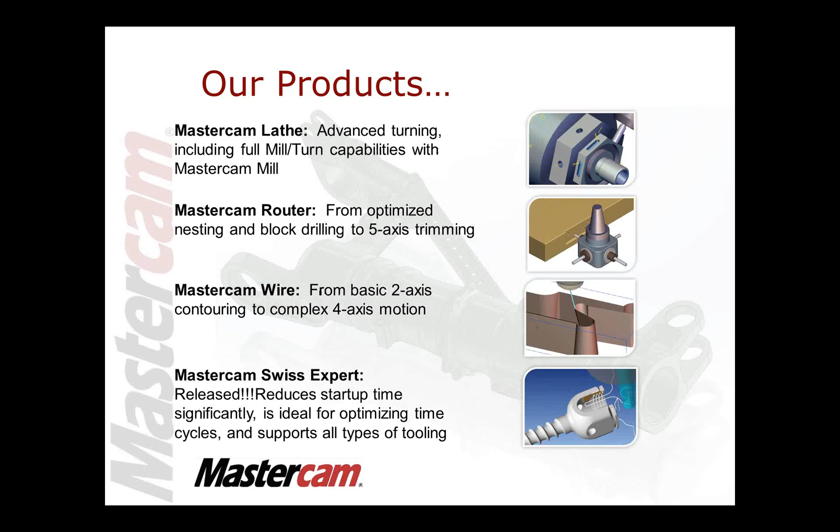As an add-in in Mastercam, if you need to do quick inspection, first article inspection, we do have an add-on now where you can buy a whole package, which includes the software, the arm, and everything. If you need more details on that, feel free to shoot us an email. Robotmaster is another add-on that's gathered a lot of interest, and we have several customers utilizing it. Basically, this allows us to program these robotic arms offline, being able to optimize and generate G-code for these. Also, you can see here on the screen, we've got it set up specifically for a welding application.

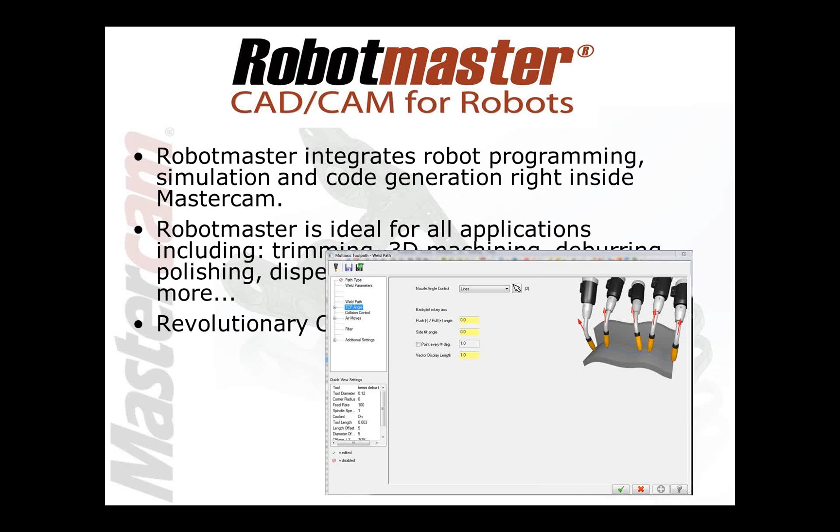CIMCO, I'm sure a lot of you already know what CIMCO is. CIMCO handles DNC, so you're able to send and receive programs. This also has another add-on, our CIMCO PDM, which is a light PDM that allows you to manage a lot of common files, being drawing files, Mastercam files, setup sheets, pictures, and all that. It just helps put all these into one database so you can quickly find it by typing in the customer's name.

So getting into the nuts and bolts, talking about what's new in X7, there's several different things in here. I couldn't put everything onto here, so I created just two quick slides showing some of the new features. Some of these I am going to cover today, the others I'm not going to cover necessarily. We are planning on doing rollouts where I'll get a lot more in depth going through all the new stuff when X7 is released, probably in the April, May timeframe.

But some of the things that are new are the new editor, some new enhancements we've done to our solids, new X-form project improvements, the new chamfering with the fillet command, surface filleting. Also what's pretty exciting is our new and improved backplot and verify utilities. Stock model has been made a lot faster, same thing with dynamic and OptiRough, better motion, faster regeneration times.

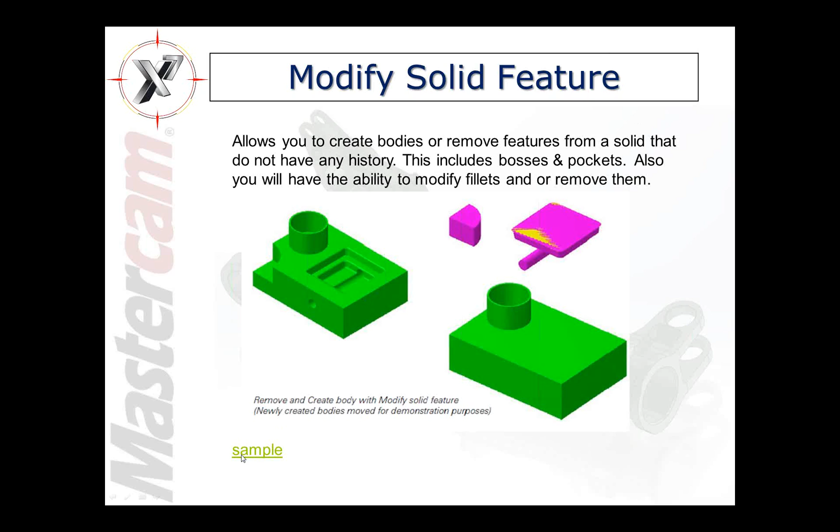But just to give you a quick sample of what we can do, basically we can take away fillets, we can add bosses, pockets. So let me go ahead and jump into a quick sample file. I'll launch into Mastercam X7. Once again, this is a beta, it's not released yet, it's only a beta.

So basically, if I have a part like this, I can go ahead and shade it. What's nice too is this part was created inside of Mastercam, so you can see I've got a complete history here. If this part was not made in Mastercam, I would not have this history.

Underneath the Solids menu here, and Solids is an add-on, you have several different items. I'm going to go through a few of these today. One of the things that's kind of nice, if you want to go ahead and remove the history and make this a dumb block, you can just say give me a dumb block, and basically it clears off the history. So now I don't have a history anymore.

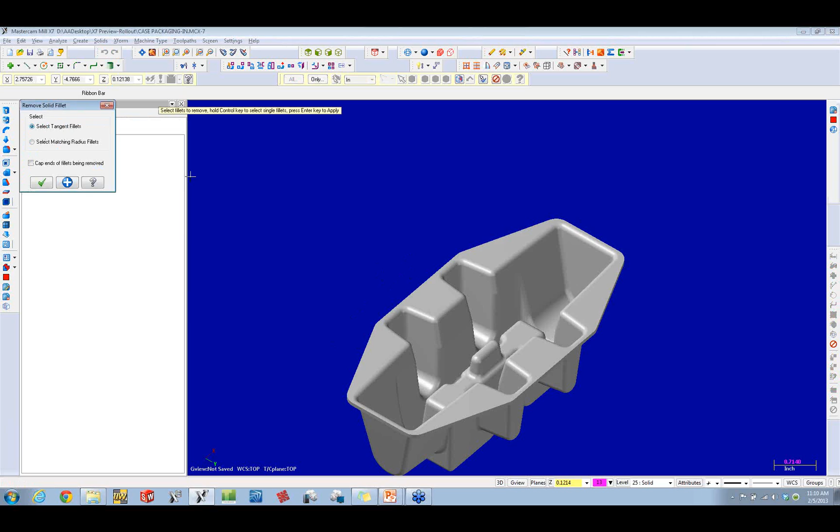Okay, so let's say I did want to go ahead and suppress some fillets in there, if I imported this from a different CAM or CAD software and wanted to suppress the fillets. So I can go into Solids and basically say remove solid fillets. Mastercam says, hey, are you sure you want to do this? Yes, so I can select all tangency fillets. If I come over here, I can click here, and you can see it picked up the edge, and I can say go ahead and just remove those fillets.

Mastercam removes the fillets, as you can see. Now, maybe what I want to do is make a quick impression of this to be able to create it for a pattern or a fixture, or maybe I want to make an electrode.

So what I can actually do is go into Solids, and let's go to Modify Solid Feature. Basically it says, hey, are you sure you want to do this? Yes, I do. So now I can either create a body, remove a body, or remove and create a body. So right now what I can do is select these tangency faces.

So if I select here, it tries to grab as much as it can. I can select here, select here. You can see I'm just going around picking it, and it's grabbing the tangency faces the best that it can. So in a few seconds here, you can see I've picked everything I want to. We're going to go ahead and create a body.

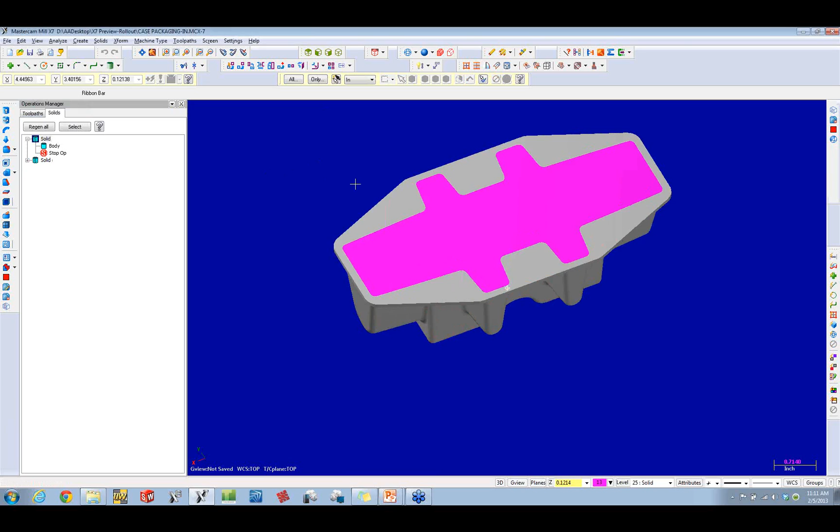Mastercam creates that body. And then what I can actually do here is simply tell it to hide, and I just want to keep that, and now, as you can see, I've got a quick impression.

So maybe I want to go in there and go one step further and modify a radius. So if I go underneath the solids, I can go under there and say modify solid fillets. Yes, and you can tell it not to keep prompting me.

And I know I've got a 90 thou radius here. You can see it picks up everything that's tangent to that. There's the 90 thousandths, and maybe what I want to do is make this 60.

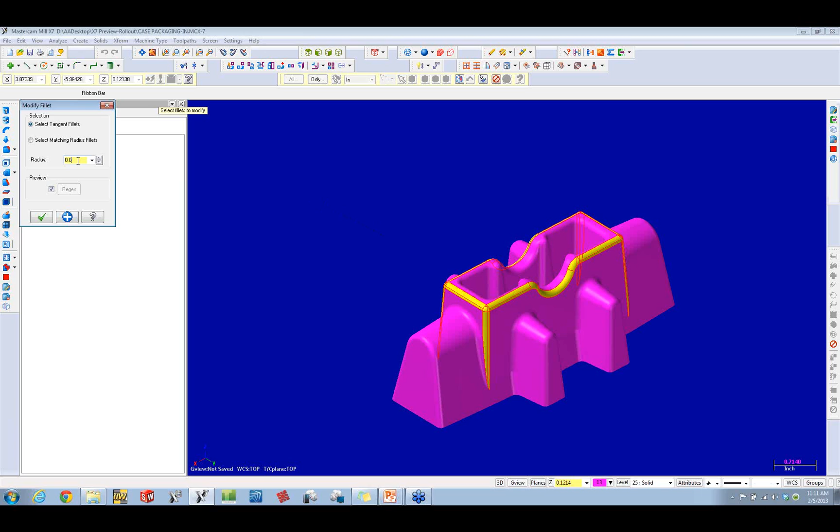So for simple, quick edits like this that you might want to make, you can make them quickly and easily with some of the new tools that are inside of Mastercam X7. So let me close out of this, go back to my wonderful PowerPoint.

Another feature that I kind of showed as I was going through there is the ability to create hole axes.

So what you can actually do - Dave Miller was the one that really brought this to my attention. It's a kind of cool feature. A lot of people think, well, hey, why do I have to create that geometry, or why do I need axis lines and all that if I'm just doing basically 2D machining?

Well, this comes in very handy because it works with through, blind, split holes on a different plane where I can get that 2D geometry quickly and easily to do maybe 2D functionality where I just want to drill a hole and pick up on that or create that point. If I've got a surface that's kind of dome shaped, what I want to be able to do is quickly and easily have a round circle that I can pick up for 2D toolpathing.

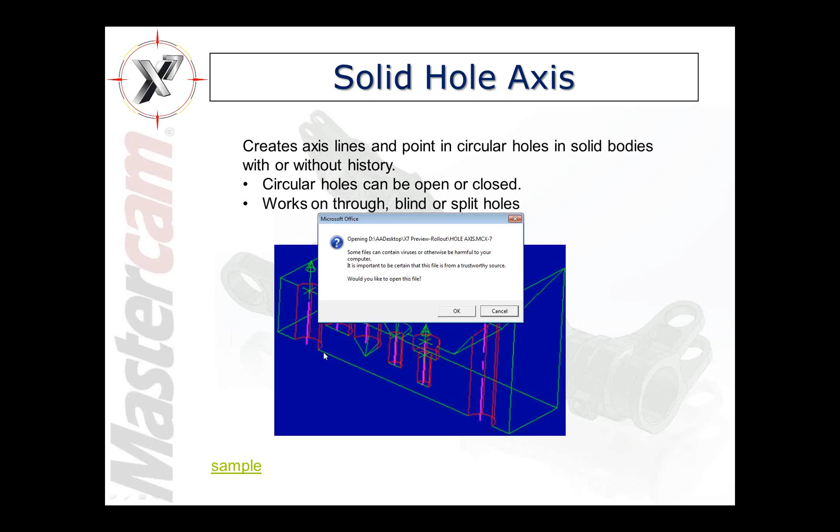So what I can actually do is click on the sample here, click OK. And basically here I can go in and hit shade. I pulled on a part. And so here I've got a part with some holes coming in at different angles.

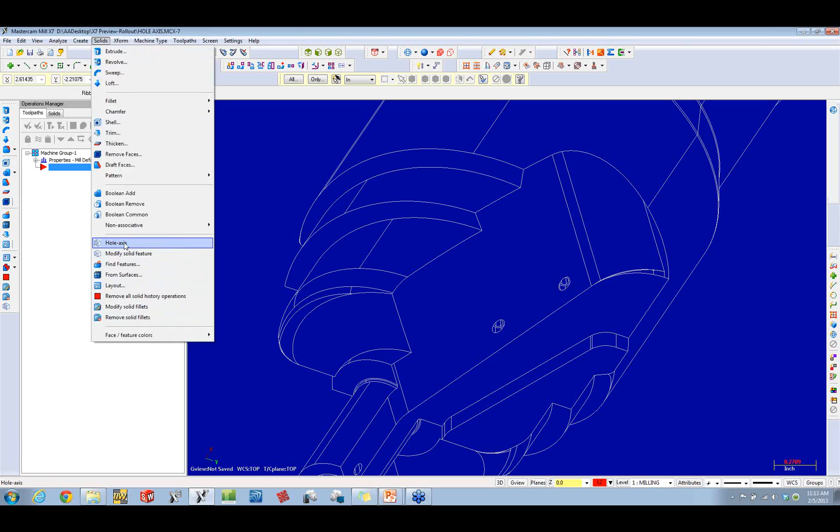So what I want to do is create that geometry quickly and easily. So I can go into Solids. I can go into Hole Axis. And basically now what I can do is actually pick on the hole axis that I want to create.

So here what I basically did was create that axis line, and I also have that 2D round circle that's there. And even on something more complex, you can see I have a surface here. If I try to create that 2D geometry, I'm going to get a spline or an ellipse. So if I click here, you can see now I'll exit out of this. And if I go and unshade, analyze that, I now have a complete arc that I can easily and quickly pick up on.

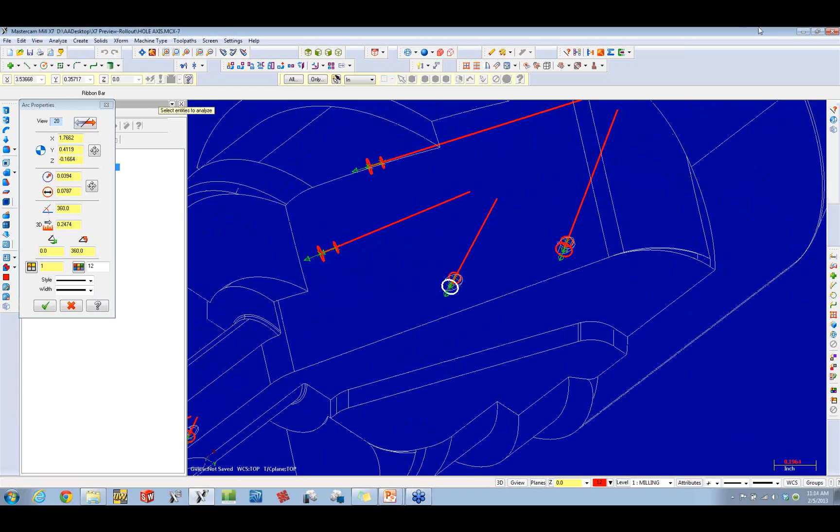Let me go on to here. Morning, Jack. All right. Hey, I could have a guest speaker. I thought it would be 100 people.

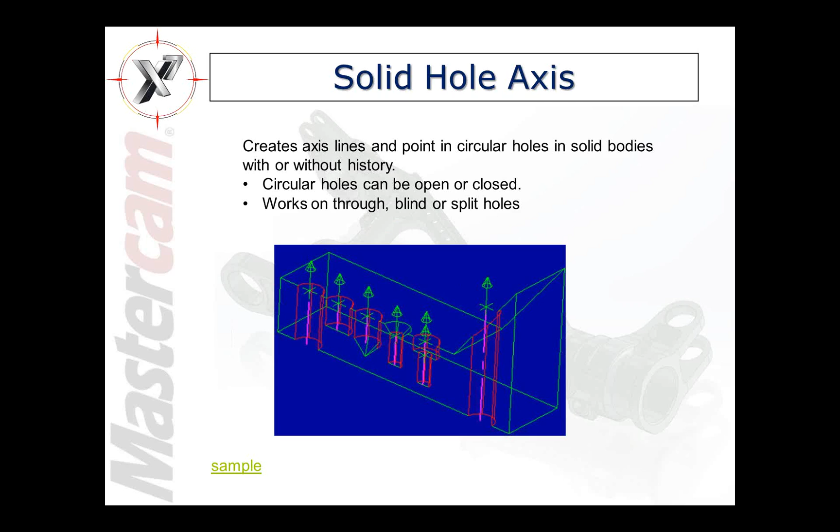All right, so going back to this, the next thing I can go through that's been improved in X7 is X-form project improvements. Basically, this is going to allow anybody that needs to project 2D geometry down onto a surface - a lot of times when you get into small, intricate parts, small lines, the tolerancing sometimes doesn't give you exactly what you want.

They've added this into the bottom of here, being able to smooth out some of this. So when I am projecting down small, intricate lines, splines, onto a surface, I can get a better result, smoother toolpath motion.

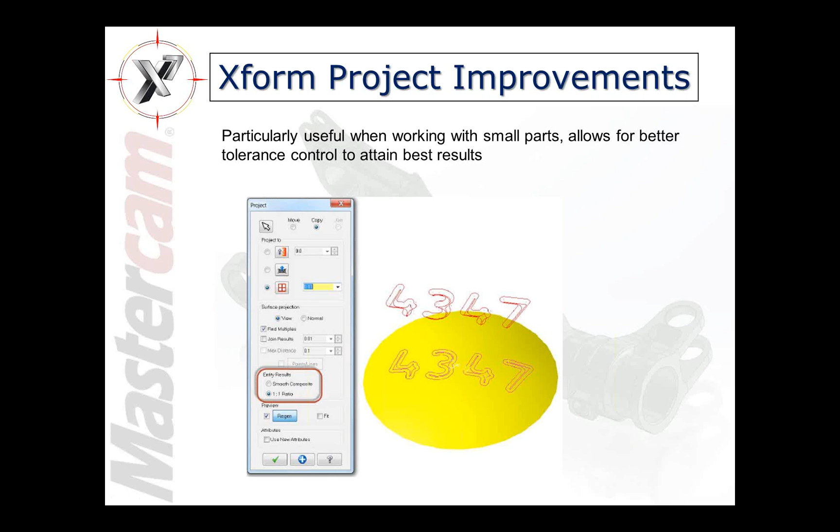Like I said earlier, they did go and improve the backplot verify. Verify as you know it from X6 is dead, they've added now this new verify. What's cool about this is that not only is it a separate window, but I can launch it and continue to work inside of Mastercam, doing my simulation, everything in a separate window. So if you guys are using dual screens, this will come in very, very handy.

Now there's a new backplot along with this, but if you want to, you can go back to the old backplot. Personally, I really like the new backplot. The more I play around with it, it is very handy, and there's a lot of good information it can give you. But I'll show you more on this in a minute.

The other thing that's brand new coming out in X7 is the probing that's integrated in with Mastercam X7. It's Renishaw's Productivity Plus, this is an add-on. This is basically being able to go and measure right on the machine: fixture offsets, orientation, critical dimensions, and there would be some post modification necessary to get this output.

What I'll do is give you guys a quick rundown on this. Once again, if you want to know more about this or would like to see something more, shoot us an email. I might even break this off, and I'm pretty sure I'm going to break this off and do another webinar where I'll just focus on utilizing this inside of Mastercam.

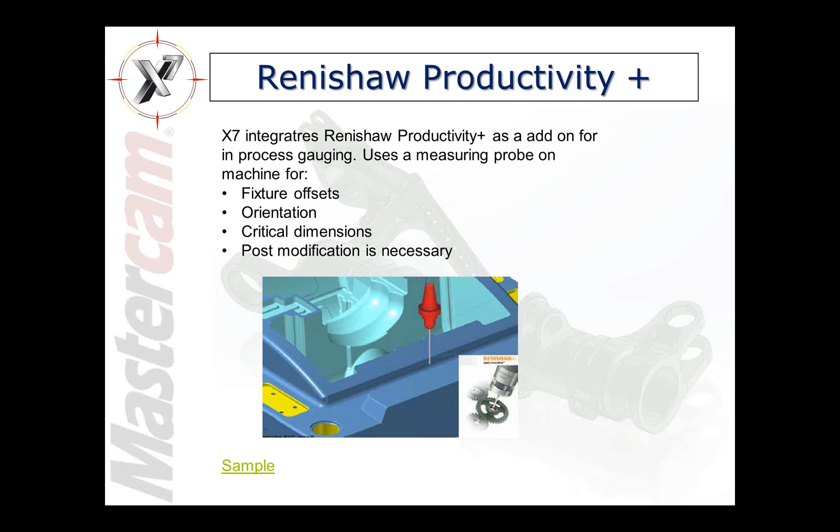So let me just pull up a file here.

So basically, here is my part. I've got a part on my screen, and I also have some of the operations with some probing on there. Now your probing is just going to be underneath your tool path. You're going to have a dialog box called probing here. So your basic main functions that you're going to use are going to be right here.

This is for being able to go in and measure a point, measure a line, a circle, a plane, corner, a 3D measure, or doing a web or a pocket, whether it's cavity or core. Those are your main ones in there.

So basically what we ended up doing right now is going into here, and the first thing I did was a probe. The reason why I did this is I wanted to go and set up my work offsets. So inside of here, I just basically took a measure of the top to set my Z, and I'm updating that back to my WCS.

Then what I did is a web pocket where I'm coming into here and basically measuring sides of my part. So here I'm coming through, I'm going to measure this side with 3 points, measure side 2 with 3 points, and then come back and hit the ends. Then once again, right here, I'm setting up to update my WCS. This can all be controlled right up in here with these menu options.

So once I have that done, I can kick into my new backplot. I'll show you what it looks like.

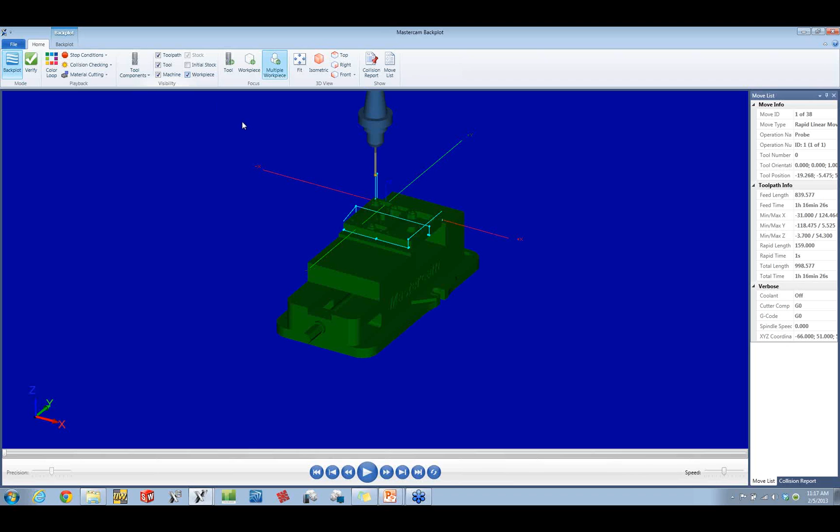Expand this out, and let's turn on my workpiece. So now you can see I have my workpiece on there. And then if I want to, I can come in, still hit the S button. I come in, you can see I just hit the top of my block. I'll come over, I'll hit this side, measuring 3 points, 3 points, and then my ends. So that's the backplot right there. You can also kick right into verify from here, which I'll show more later on.

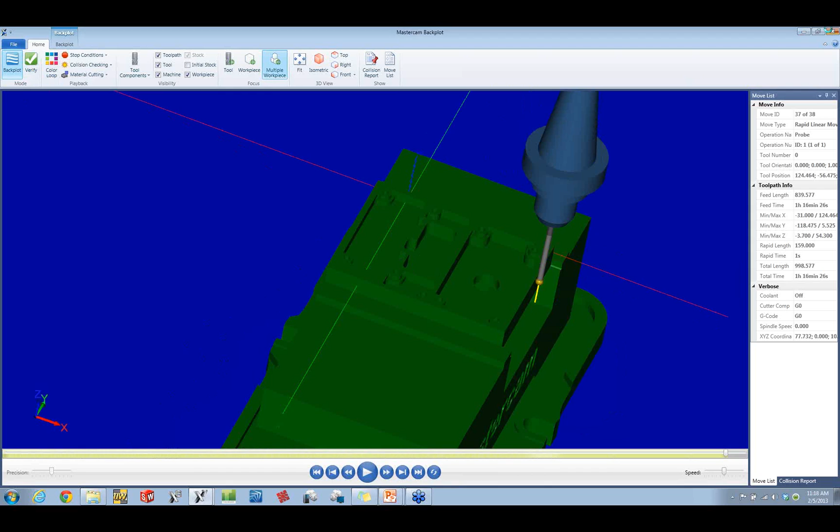So we'll close out of this operation. Now the next thing I do here is I come into a facing operation, just a typical facing operation. All I want to do is take this and just face off the top of my part. Now once I do that, I want to go back in and make sure that it's right, that I took off enough stock, I'm not leaving any stock.

Once again, I go in with my probing routine, and basically with this, I'm telling it to go ahead and inspect it, measure that plane, and make sure that is correct. If it's not, it will go back in, reference back to the facing operation. Once it goes back in, it will reference back to the second operation, making sure that it is correct.

So once I go back and update those, it makes sure that number coincides with what it's supposed to be as far as the plane being zero. It will either move to the next operation or go back and replay the facing.

Okay, so with this one, let me turn on my backplot feature here. Basically what I'm telling it to do now is come in, drill that hole, and then the next thing I create here is a tag, or a label as they call it.

The label is calling up this bore as something I want to inspect. I've gone in there, called that hole label 2, and then I'll go in there and hit it with a contour pass. So here, if I backplot this, you're going to see I go through and circle mill this out.

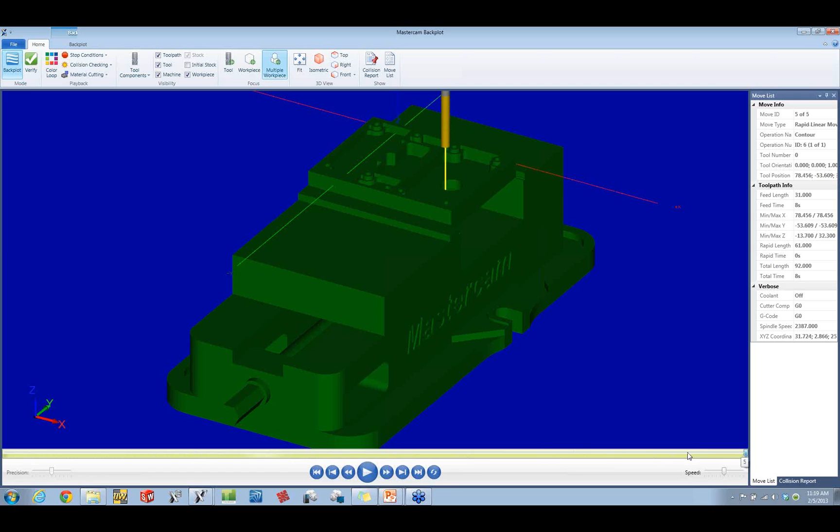Now what I want to do is make sure that is correct, and this is where I can really get creative on how I set this up. So the first thing I want to do is a 3-point measurement of that circle - where the center is, what the diameter is, it's an inside. If you guys have ever used Productivity Plus, a lot of this stuff looks very familiar.

And then what I can do is say, all right, if it hits my diameter, move to the next operation. If it doesn't, go back and rerun that operation again. And I can control my work offset based on that.

But that's kind of a quick rundown. Let me go ahead and post this out now. So what I'll do is post out the G-code and show the new editor too. Let's overwrite this.

Post all, yes. Right now it's going to ask me which Renishaw machine file I want to use. I'm going to just use my Haas macro and tell it to go ahead and process. It processes everything through - there's no errors.

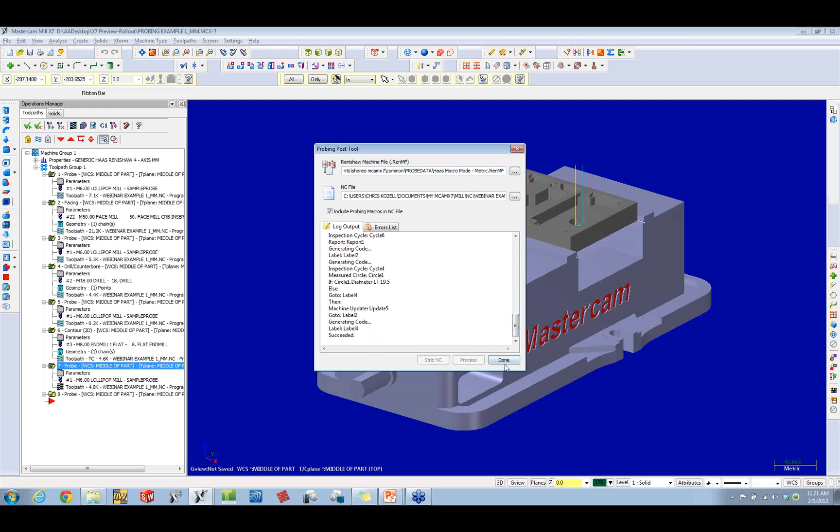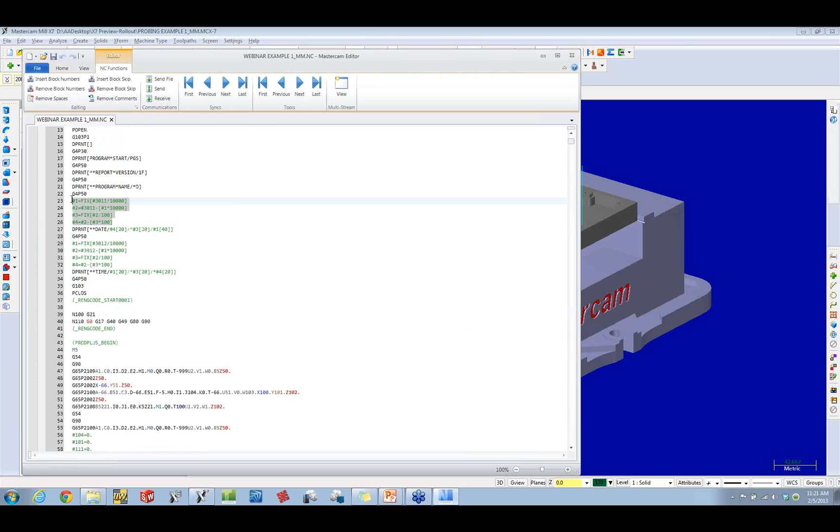And then I hit done, and now I launch into the new editor, which is called the Code Expert. So here you can see a sample of the code, and it has the probing routines already set up into here. And then I get into the heart and soul of the G-code.

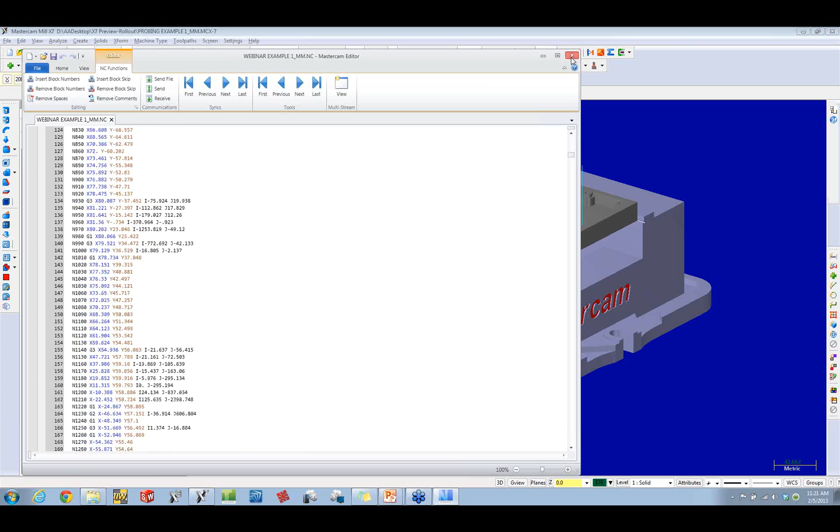Back to the PowerPoint. So I just showed you guys the Renishaw.

Now I'm going to talk a little bit about the new tool manager. Originally on the release of X7 it's going to be specifically for the mill side, then we're going to release it for the lathe side. What's cool about this is, once again, it's its own executable, separate window.

It runs off the SQLite format. It's got holder support, assembly, custom tool improvements, and also we can do speeds and feed lookups from the manufacturer, which is pretty nice. They're going to slowly start integrating all this in there with material, so I can actually pull the speeds and feeds recommended from a lot of the major tool manufacturers out there today.

So let me go ahead and launch into that really quick. I'm going to exit out of my PowerPoint - I've created a shortcut down at the bottom of my screen. This is the new Mastercam Tool Manager.

Once again, the tool manager that you guys were kind of used to inside Mastercam X6, it's still there. This is its own standalone. What this is going to give you is a lot more flexibility on setting up tools, holders, and doing a complete assembly based off of that.

So right now I'm going to open my library, and then open up my assembly, my holders, and my cutting tools. You'll see 3 tabs get populated across there. This is just a generic one I updated from X6 - all I did was take the ISCAR library and update it from X6, and you can see the different tools as I go through here. What's cool is I can dynamically rotate right into here.

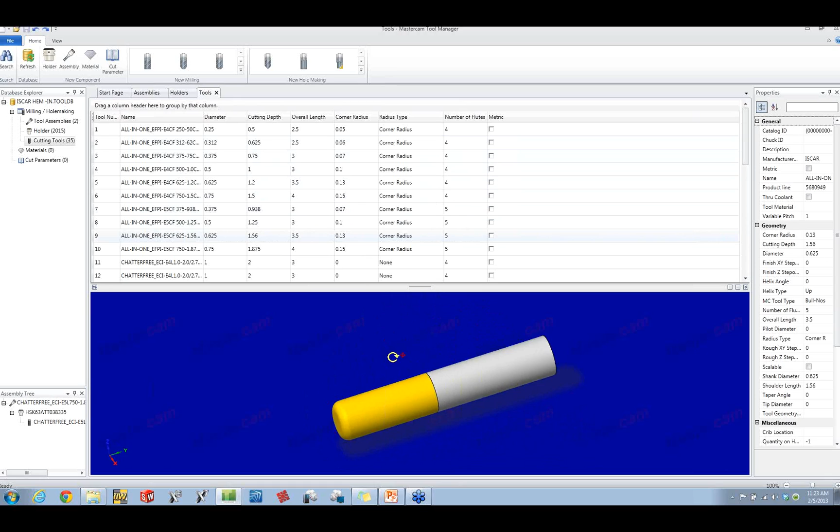If I want to see what the holders look like, I've got holders already set up in here that I've been playing around with - once again, I can dynamically rotate. Notice on the tool side, when I go into here, look at all the different information that I have available over here.

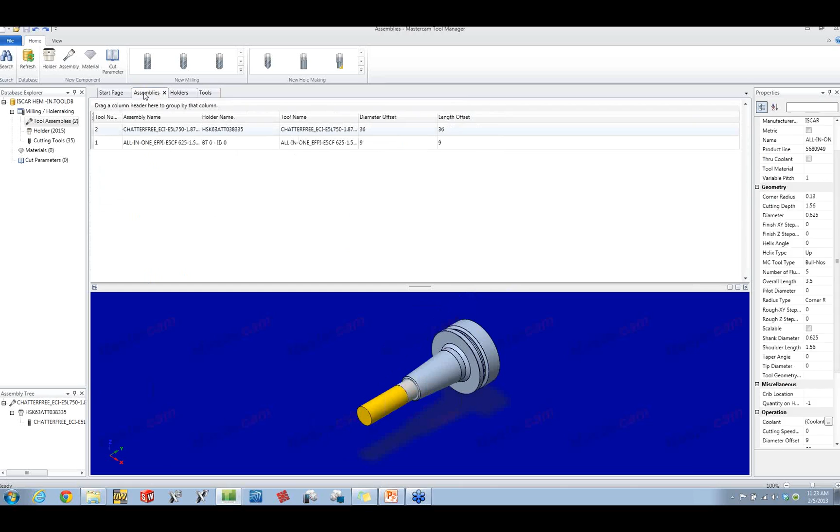So if I click on tools, there's a lot more information available to you for outputting, not only for something like a tool crib or some kind of tool management, where you can feed back a lot of different information back and forth, which is going to be nice. The other thing that's kind of nice too is the assemblies in here, so I can call up different assemblies.

Before, if you were programming in X6, you had your tool and then you had your holder, but you could never save both of those out as one assembly and then anytime you wanted to use it, use the tool, the holder, everything in one shot. This is going to give you that compatibility and usefulness to be able to use this.

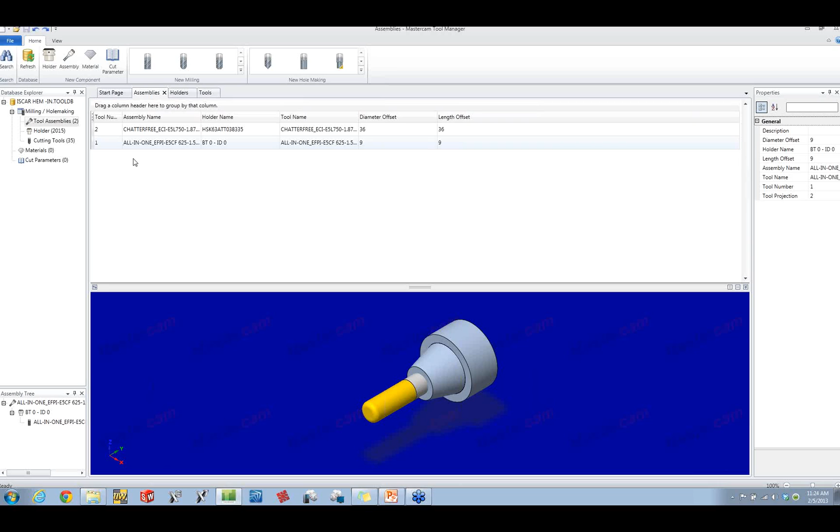So what I'll do here is quickly show you, on a quick note, how to set up a new tool assembly. What I'm going to do here is just go into create a new assembly. You'll notice here I've got my assembly down here, there's nothing in here, so I'm going to go to the holder.

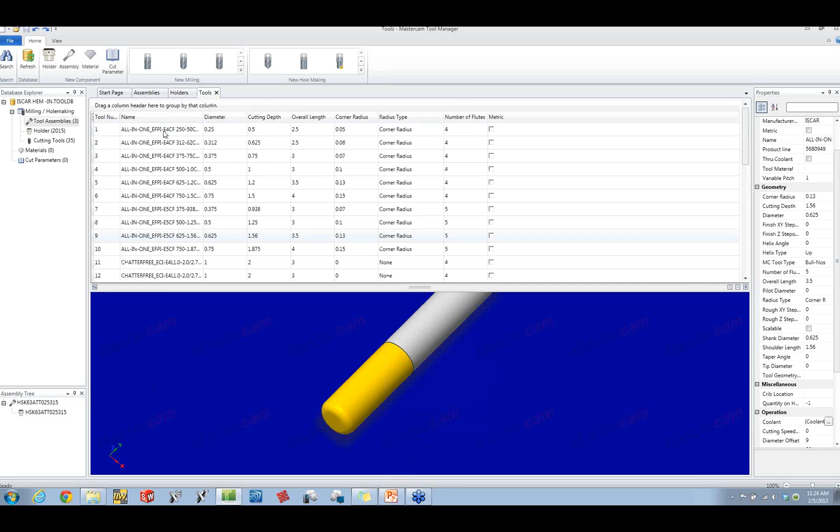The first thing I can do is pick a holder. What's cool is it's really easy, it's a drag and drop. So once I drag and drop, there's my holder. I can go to Tools, pick a tool that I want to use, maybe I'll use the 1/4 incher, and once again I can just drag and drop that into there. There we go, so now I have my tool and my holder all set up into here.

Once again, I can rotate it around any which way I want to. I can modify different features about this, but I can now save this out as a whole assembly inside the Mastercam software to be able to pull up at any point in time.

You can even go into here and change your tool projection, how far it's sticking out. I can go to 1 inch, you can see it graphically updates right on my screen. Change it again, go to 2 inches, you can see it can update, so you can have your stick out at different lengths.

But it's pretty nice. Once again, I'm going to probably go into more depth as we get closer to the release. This is something we might do a quick webinar on. If that's something you guys would like to see, make sure you shoot us an email on how to set this all up and set up all the different tools inside of there.

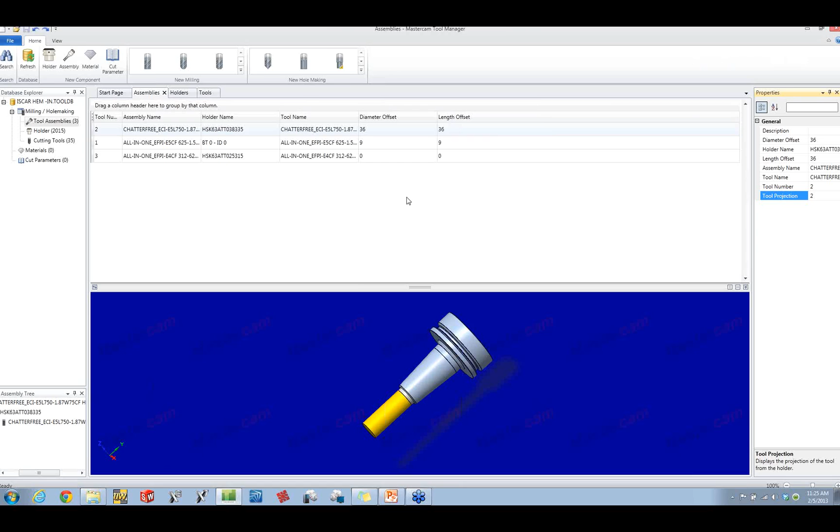Let me go from the beginning. Let me jump back into here. I hit the wrong button.

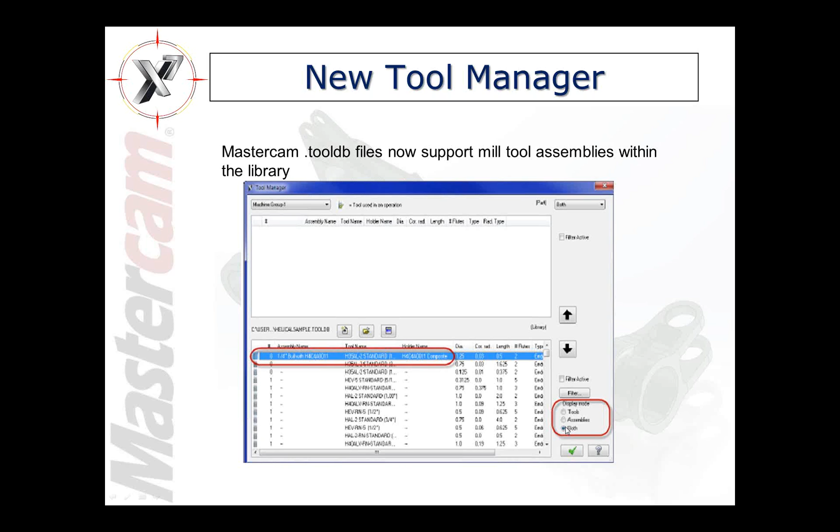Another thing that's kind of nice too, as I was talking about before, is once you do these assemblies, when I go into Mastercam, I can actually tell it to just bring in the tools, bring in the assemblies, or bring in both. That way I can verify and be able to see everything that's inside of there.

If you guys are doing custom tools, they did make a nice improvement. If I've got to share files with somebody else, a lot of times I'll have my own library that I'll set up with my different custom tools, and if I don't send my library along with that file that they want to view, I'll get an error saying it couldn't find that custom tool, unless you embed it in the file, which you can manually do now. Basically what you have to do is bring in that geometry, put it on a different level, and then that's saved with that file.

But that's just say I did draw it up, or better yet, I'm importing that profile in from the tool manufacturer. I can tell it to go ahead with this new button and export that profile right into this file that I have open, on a level that I dictate which level to go on.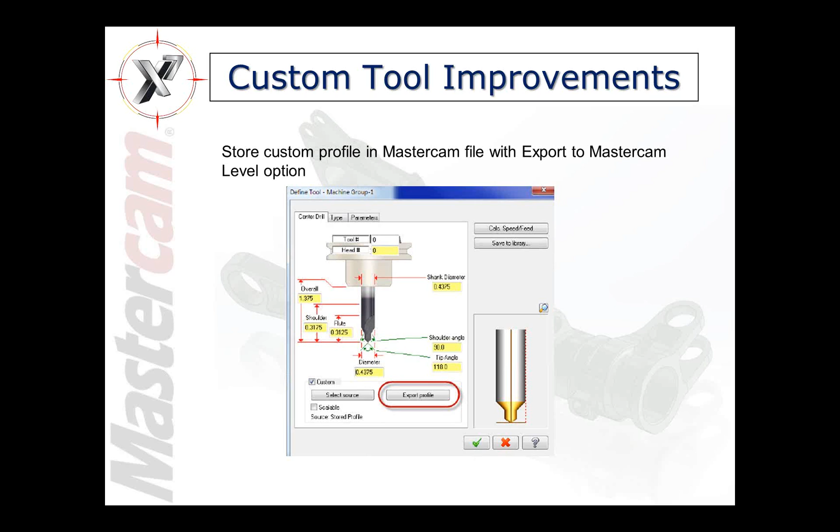Getting into some of the new things they've done with the 2D milling, they've added multi-threading support to all the 2D HST toolpaths. What that's going to really mean for you is faster calculation times. They've actually sped up everything across the X7 platform, anything from 2D to 3D, lathe, all the calculation times seem to make a huge improvement.

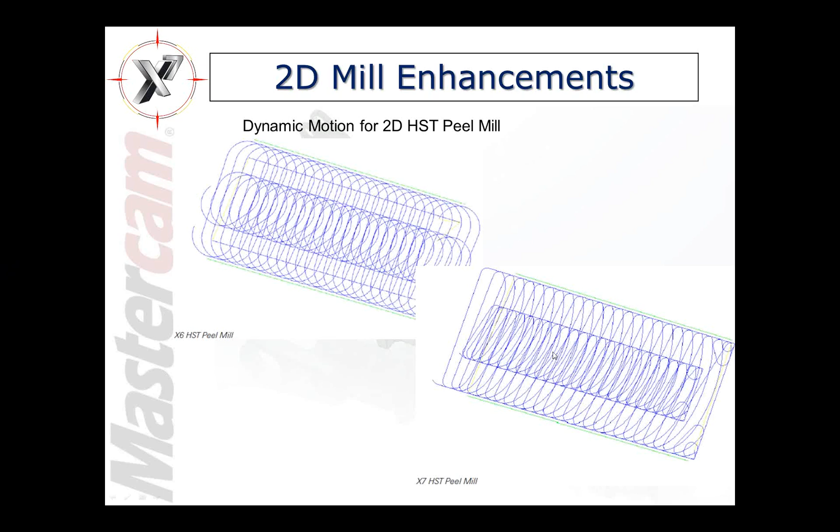Another thing they've kind of enhanced is the peel mill, which has become a pretty popular HST toolpath. They've added the dynamic motion inside the peel mill. As you can see here on the left side of the screen, this was the old peel mill that you used to have, you just had a specified loop. Well now we can get that dynamic shape inside there with the peel mill.

Blend, they've made improvements to blend. We now allow the finished passes as an option, so if you want to go in there and make one finished pass on the walls, you can.

Synchronize chaining, what this will allow you to do is just get better results on the toolpath that you'd want. As you can see on the left side of the screen over here, this was the old way. With the new way of being able to synchronize the chain, basically it looks at each side of each chain - you'll basically have two chains - and it will try to sync out the toolpath to give you a better result in the end.

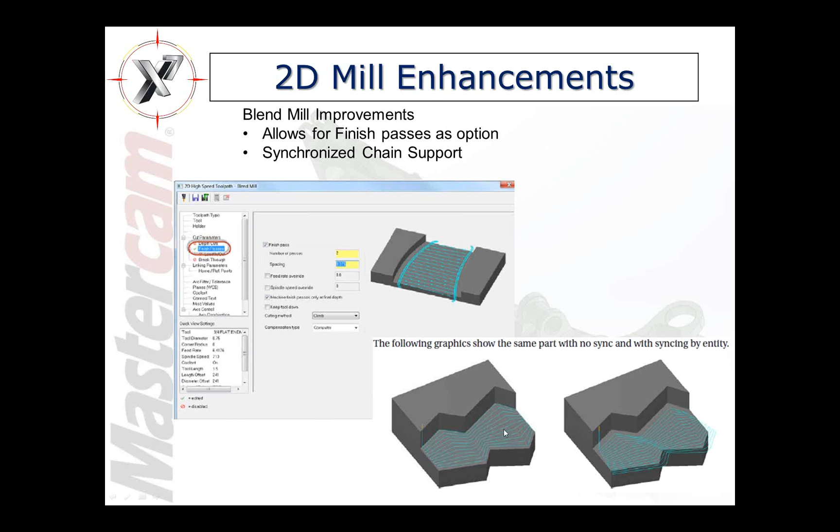They've also added the ability to extend the entry and exit on each one of those toolpaths. That way I can get the tool to overhang more or less based on the stock that I have.

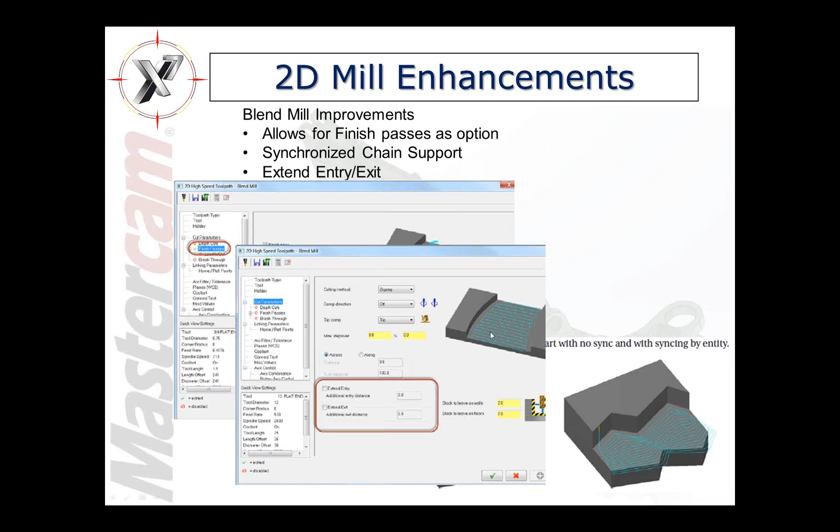On the 3D side, they've added optimization inside the hybrid toolpath. Hybrid is a great toolpath if you guys have never played around with it. It's become one of my favorites because it combines two of the most common toolpaths I used to use, which would include waterline and also a scallop cut. Basically, this will cut both of them for you.

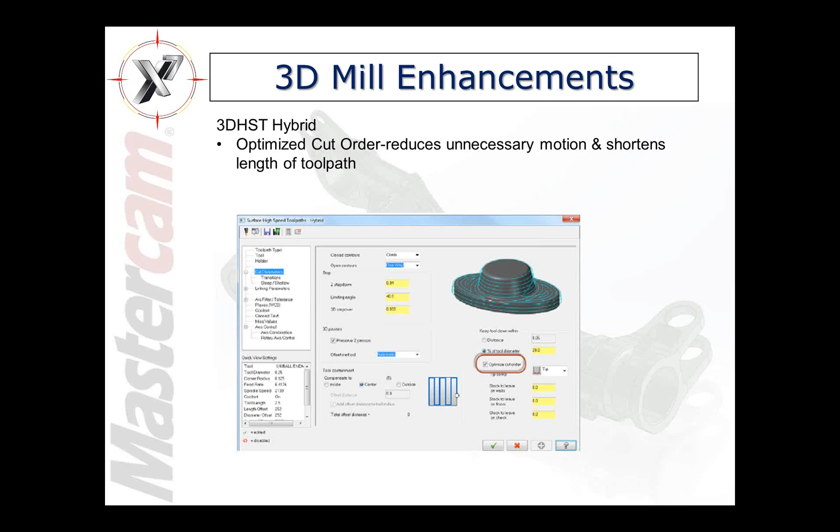They've added the ability to optimize that cut order. Basically, this is going to reduce unnecessary motion and shorten the actual length of your toolpath.

On the hybrid side, they've added the ability to control how we handle open and closed passes, whether I want to go one way or zigzag, especially on those open profiles that I have. This will allow you to process those toolpaths much more efficiently and shorten that time.

On the hybrid side, they also added the ability to have automatic offsets. That's been better, so I can blend between those steep and shallow areas, how I transition. So instead of once I hit that 45 degree where I want to go into like a waterline path, I can actually have a better blend where they overlap. That way I don't leave any excess stock sticking up, whether it's left over from the scallop or from a ball end mill.

The other thing that's really nice is as I approach those boundaries, if I do have a boundary, they've made an enhancement to be able to smooth that out.

The other thing I thought was pretty interesting is how they were able to make faster calculation times. They've got smart regeneration. What this really does is only recalculate the areas that have changed. So if I had a big block and only changed one little section, but I was looking at everything and the toolpath, it's only going to recalculate the areas that have changed.

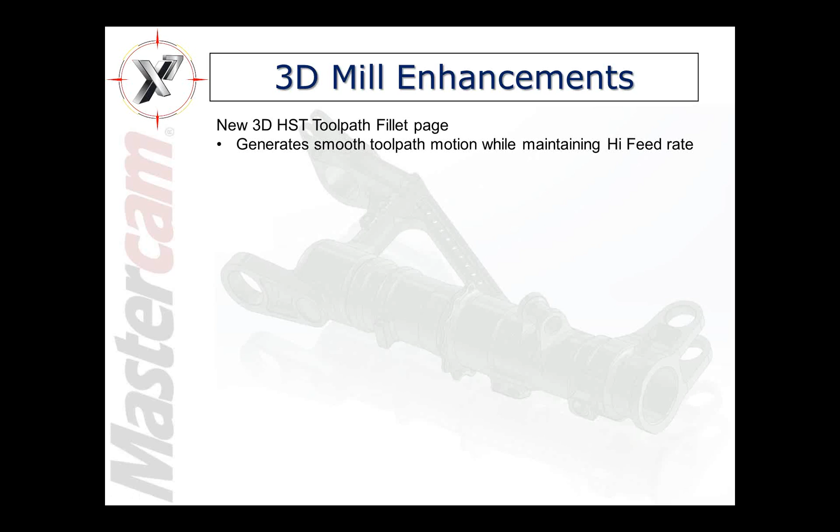They also added the ability to add a toolpath fillet right in the HST toolpath. This will allow you to generate smoother toolpath motion at a high feed rate.

That can be activated underneath the arc filtering, underneath toolpath fillet, and here's what it would look like.

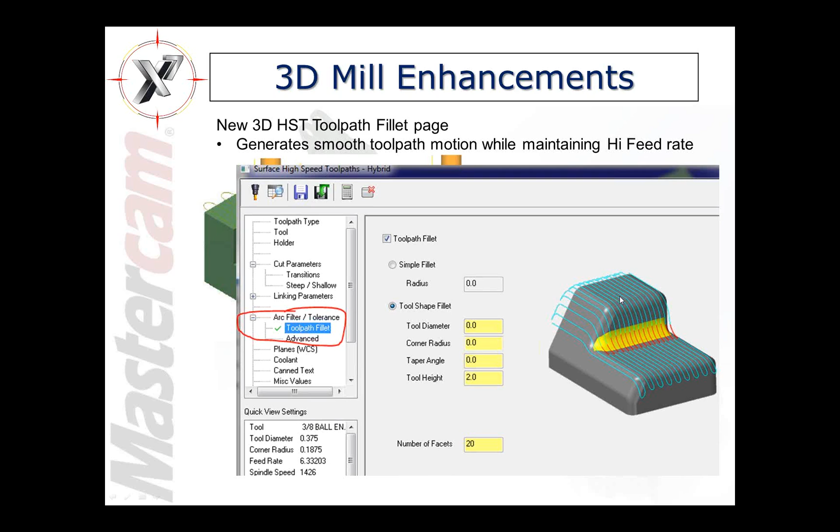Underneath the OptiCore and OptiArea toolpaths, once again, they've added some things in there, not only the smart regeneration, where we can look at the previous model and only regenerate that area, but they also added the ability to optimize the cut orders, which is nice too.

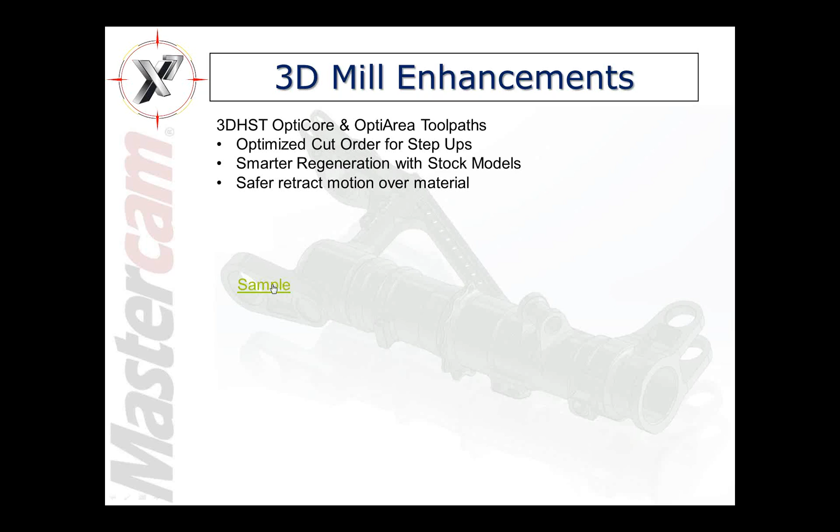Let me just jump into that. So here I have a part.

Here's my shaded part. So if I want to, I could go into the parameters here, and I'll show you where they made that change. Right here, you used to just have optimized cut order, but now I've got a couple of different things I can do here. I can optimize based on the pocket, based on the depth, or based on the closest.

And if you go into the help here, there is a section where you can go in and see the differences underneath optimized cut order.

Basically, by depth, Mastercam will machine all the Z passes by Z level, so as it works down, it's going to always jump back and forth based on Z level. Next, closest moves to the next closest cut where it finishes the previous cut. And by pocket depth, you can see it's going to try to finish that depth before it jumps to the next pocket.

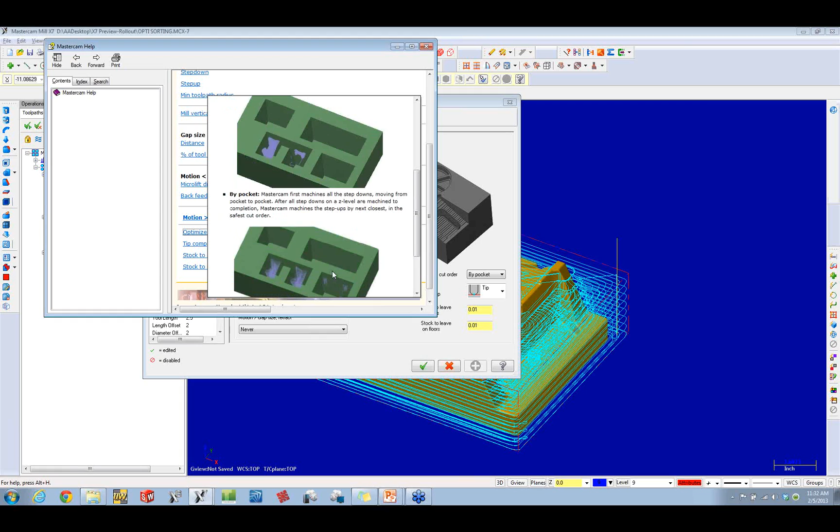So you've got some choice in how you want to optimize based on the geometry, whether you're doing a core or a cavity.

So I can kind of show you here. We can kick into this. And let me turn on my work here, and we can step through this.

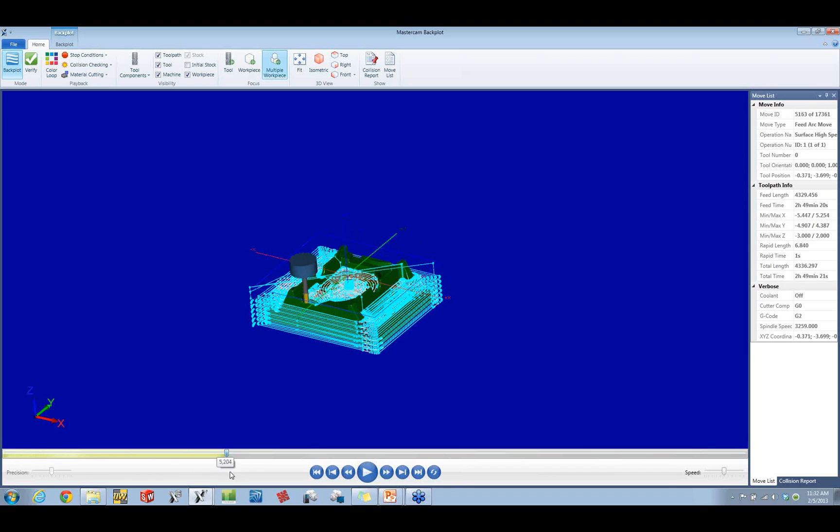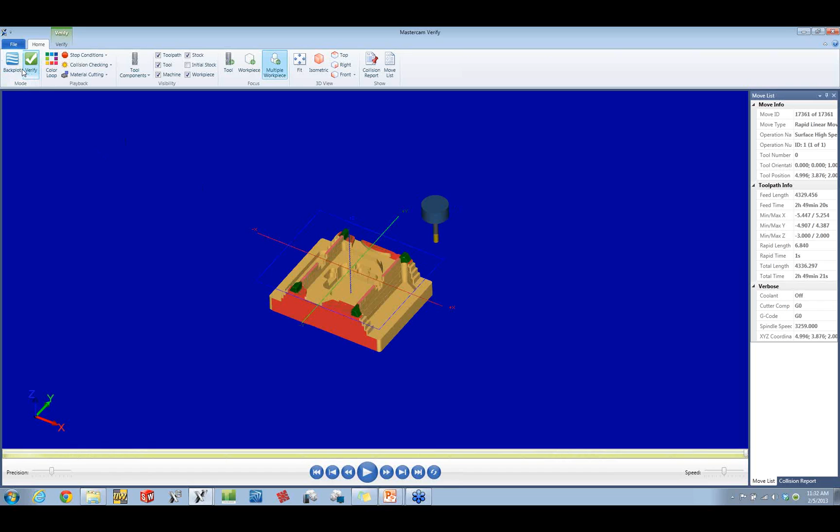Now what's also nice too is if I want to see this, I can always kick right to verify without having to exit this, and I can run it right through verify here. So I don't ever have to jump out of backplot, go into verify, or vice versa. I can just come back here and click on verify or backplot, which I think is pretty nice. And then you have some other commands here, which I'll get into later on a different webinar.

One of the last toolpaths I'm going to talk about that's kind of new is they've added the ability to project your toolpath with the new HST style type toolpaths. Before, you could only do pocket, I can't remember the other one off the top of my head. Basically now we can project geometry, or a previous toolpath, onto a 3D surface. Most commonly people use this to plunge out areas, picking a point and projecting those points down onto the surface to drill out those areas, or they'll use it for engraving. I'll show you the difference quickly on how this works.

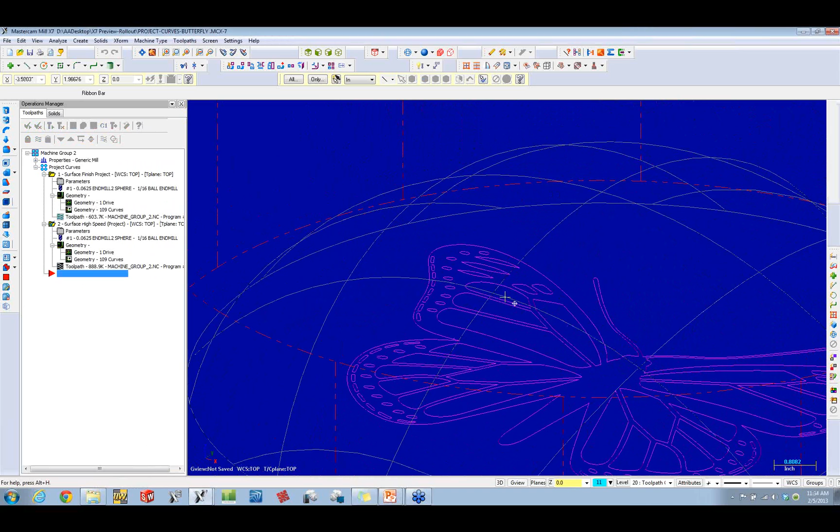So basically, this was the old way, and the real difference in the toolpath I'll show you here. This is the old way where I basically took a finish project and projected my toolpath down to engrave this. But if you look at the high speed way, now you can see I've got nice transitions on and off my model where I'm not going to see that tool coming down and plunging directly down in there. I can control these nice transitions of arc on and arc off, and it's pretty easy to use.

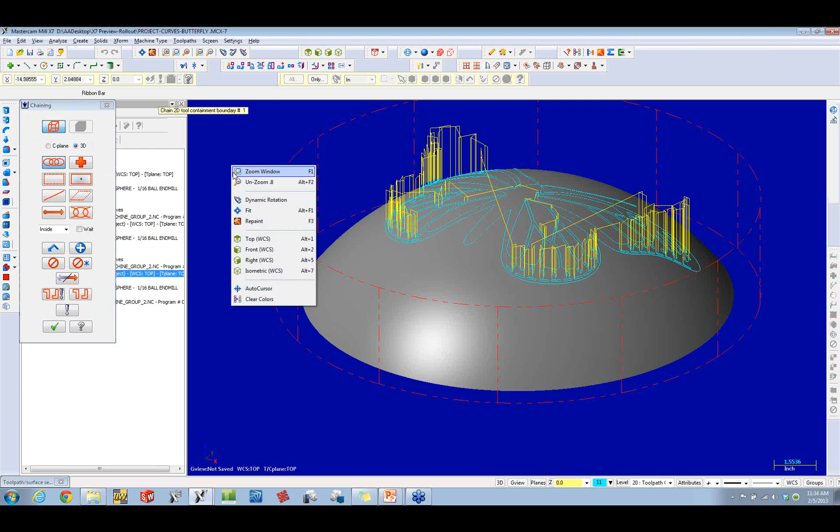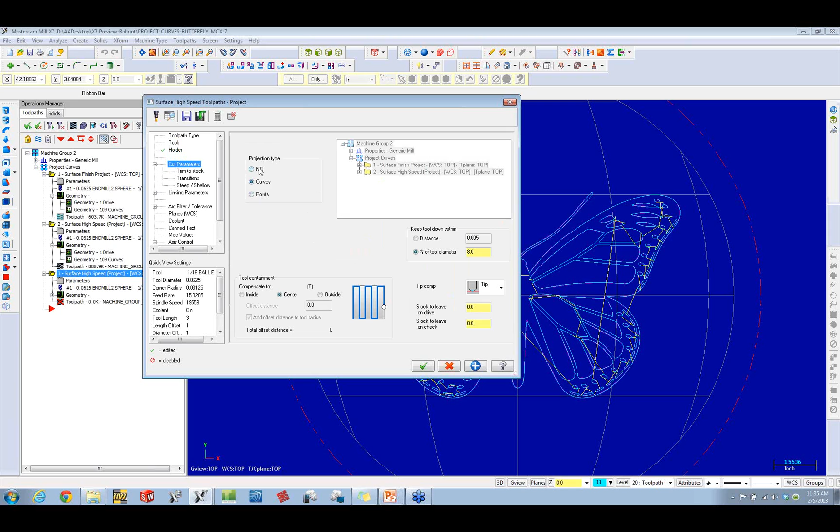You'll see that if I go into Toolpaths and into my high speed toolpaths, project has been added to one of the finishes. I can just click on project. Mastercam prompts me for what surface I want to use, so I'll click on this surface right here. That's the surface I want to use. Then if I go to a top view, we can go to my curves, shade it, and put a window around what I want to project down. Enter the search point, I've got my geometry. Now I can tell it what tool I want to use, whether to bring in a holder, and my cut parameters. We are using curves, but we can use points, or I can look at that previous operation, maybe a 2D operation, and project that down too. Then just click generate, and I will have my operation.

So I know Matt had a couple of polling questions that he wanted to run. Matt, you ready for that? Sure, Matt's just going to throw up a couple of polling questions here. So if you guys don't mind, just take a quick second. Unfortunately, I can't vote. Did we get enough? What was the other one you wanted to run? You can ask the other ones at the end.

One of the other things that I found a lot of companies asking me about is, there are some nice enhancements in X7, no doubt about it, especially with being able to modify the solids. But I've run into a lot of customers that already have SolidWorks, Solid Edge, or Pro E, and they're looking for different ways to quickly fix bad geometry. A lot of times you import it in, and you've got a missing surface or a bad solid, and it can take a long time to make these quick fixes to the model if you don't have the ability to run into SolidWorks, Solid Edge, or Inventor, or it just takes a long time on those different products. Or the other scenario we run into is customers looking to quickly create fixtures. I happen to run across a product that a lot of our customers are utilizing, which is SpaceClaim, and I have Roman here.

So I'm opening up an IGES file of a landing gear model to show you how we can work with it, clean it up, build a fixture for it, and get it ready for manufacturing.

First of all, one thing you'll see is that instead of having a watertight solid, it's just a collection of surfaces that are there in the model. SpaceClaim's repair capabilities are automated so that if you want to bring several surfaces together into one, you can do it - repair this model, fix it, and clean it.

If there's faces that are entirely missing from a model, you can't make toolpath on it. SpaceClaim will patch a face in so you can make a toolpath there, and turn this into a watertight solid. We have additional tools to help repair models, such as getting rid of extra edges which may be getting in the way of a nice flow path or tool path on the part or model. You can always click and fix and clean your model very quickly.

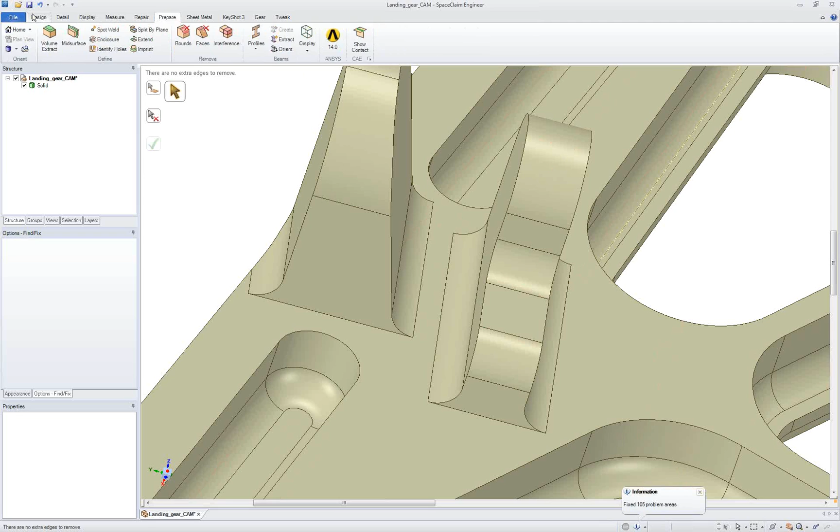But more importantly than just cleaning a model, SpaceClaim has great tools. If you need to take a part and edit it, you can do so. We've made tools that are simple to use so you can get in and make changes you might need to make to a model.

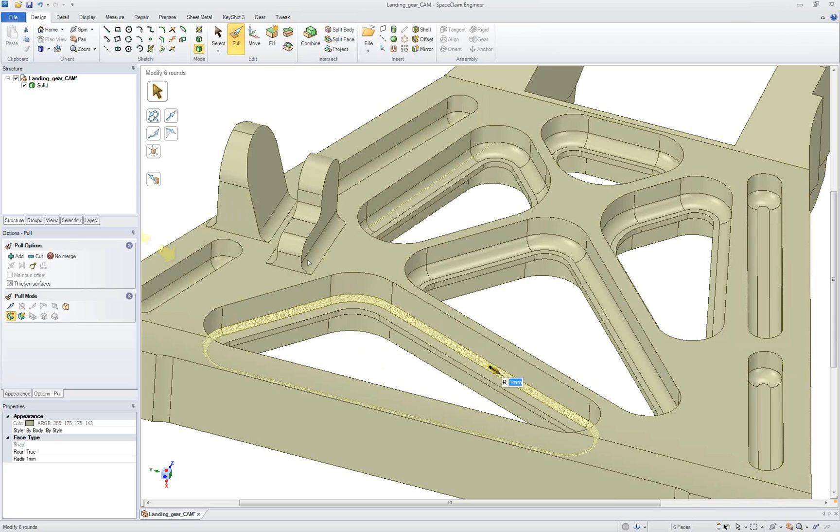If you need to change the size of a round to make them larger or smaller, SpaceClaim can do that - even going through and finding all the rounds on the part, with one click we can change their size. And it's a precise change you're making to the geometry, which is really nice.

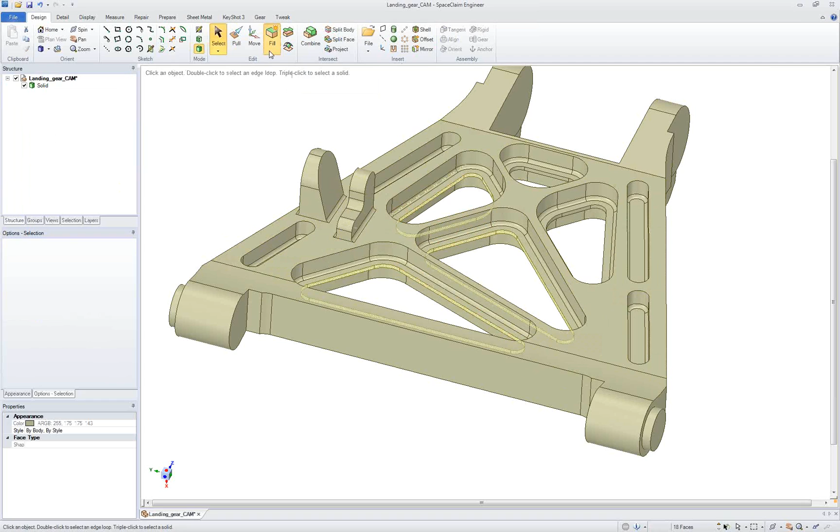If you need to prep a part, if you need to simplify the design to get rid of features that are going to be made in a later milling process, SpaceClaim can pull them to make them larger or smaller, or we can fill in pockets that are there - a great way to turn this into a clean surface for cutting.

Or even if you're going to have to mill this end part of the model off, SpaceClaim can take this and clean this up as well - just selecting the faces on the model that we want to get rid of and filling them in to remove them.

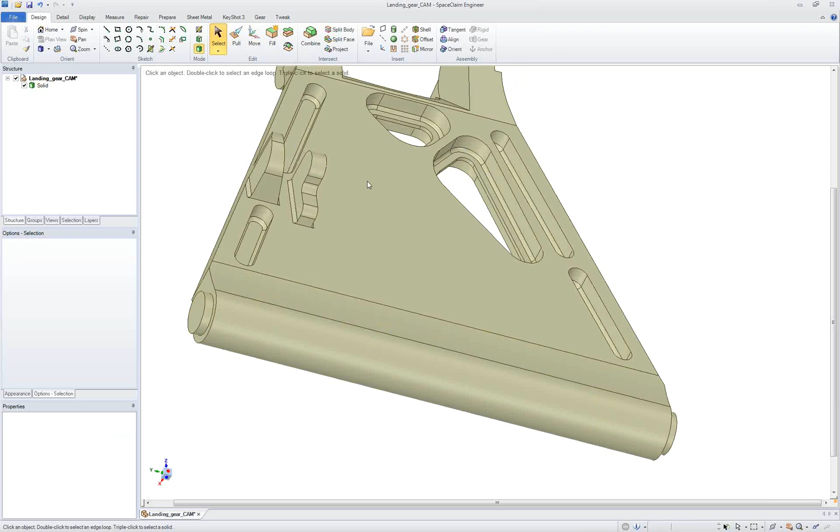So prepping the design, getting it ready, and removing the geometry that you don't need from the model when you're making a fixture for it.

And speaking of fixtures, this is the neat thing about SpaceClaim - not only do we edit geometry, but if I wanted to make a fixture, make some soft jaws or something to hold the part, it has that tool. It's tools built for a manufacturing engineer to make designs, tweak designs, and edit them on the fly.

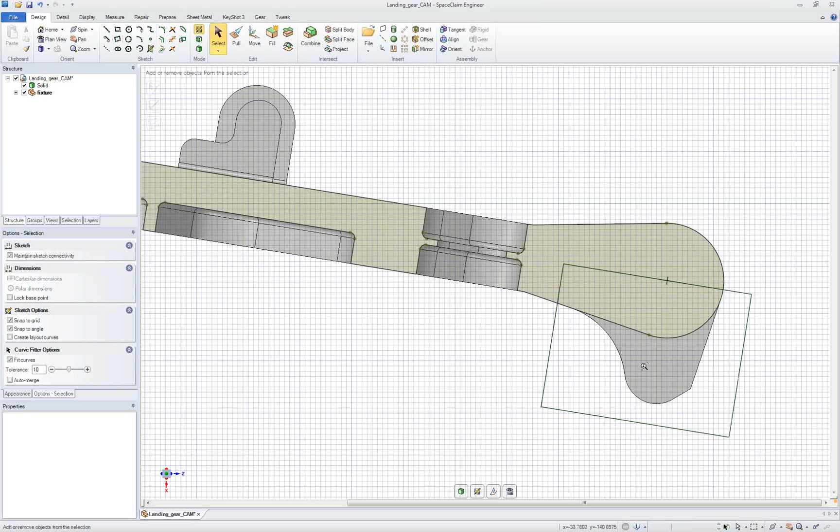So without having to know about the geometry coming in, we can sketch, create, and make a model. The best part about this is as we change the model or change the design, it's just pull - that same tool that I use to edit the incoming part is the same tool that I would use to create geometry, pulling it to make it larger or smaller.

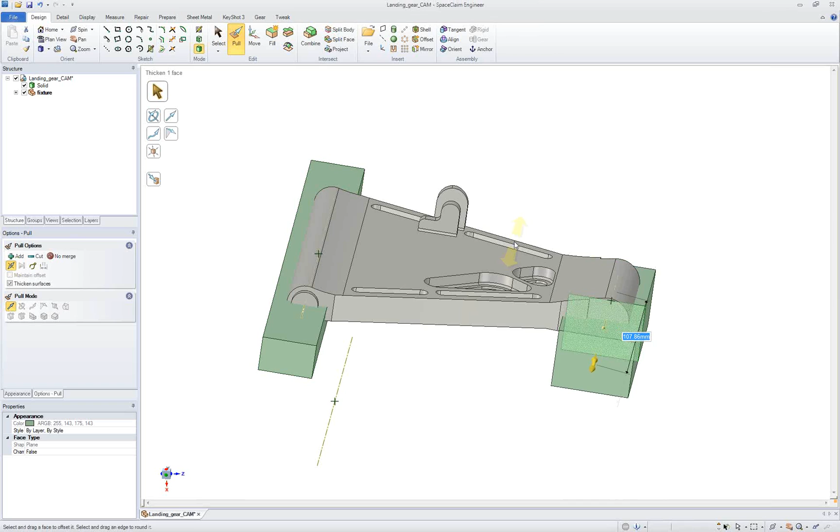If I know the exact size that I want to make, whether it's 100 millimeters, 200 millimeters, 5 inches, I can type that change in and make it on the fly. And for us, if I want to use this stock and cut away to make our fixture, it's as simple as saying I want to cut one model with the other.

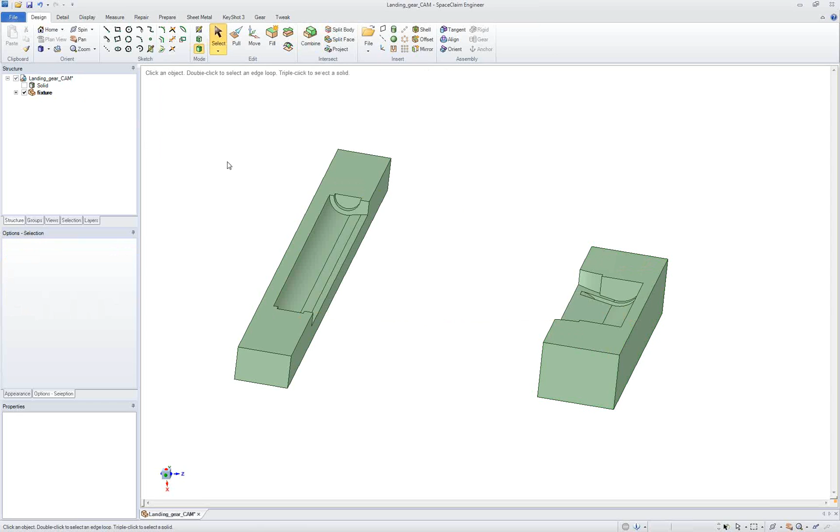So again, it's simple tools that we've built for the manufacturing engineer to make toolpath easier. We've talked to a lot of customers out there, and no one really makes money from working and fiddling around with geometry.

You make money cutting parts. So having easy tools to take, manipulate, change, and model is great. Having tools that let us take a design that's there, and if we want to make an offset face to machine a nominal tolerance, let's do that. Offset faces inward or outward, or offset them backward slightly so it fits better into the model.

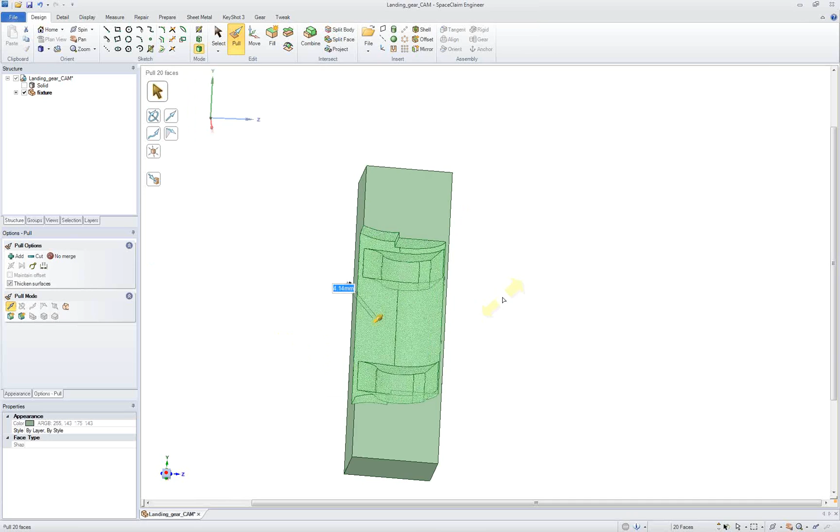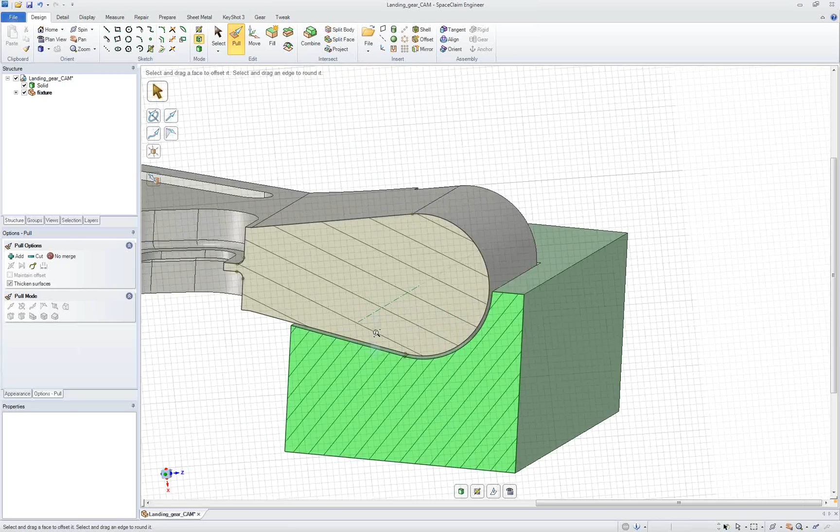Whether you're offsetting a few surfaces or a bunch of surfaces at the same time, these are tools we've designed for the manufacturer. So you can make, change, and modify a part before you actually need to make the change. And after you make fixtures, after you make a part, after you change the model, all of this can be sent directly into Mastercam through an integration through C-hooks.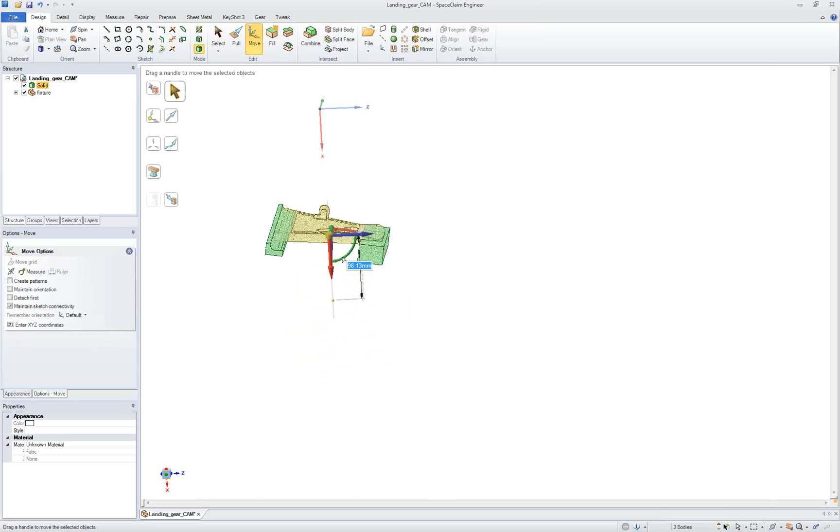So again, it's a lot of tools we've built to use and change the model. Even taking something as simple as an aerospace part which might not be designed or placed at the origin, and being able to move a part around a design or model to change its location, or simply put in our own local origin on a part or model.

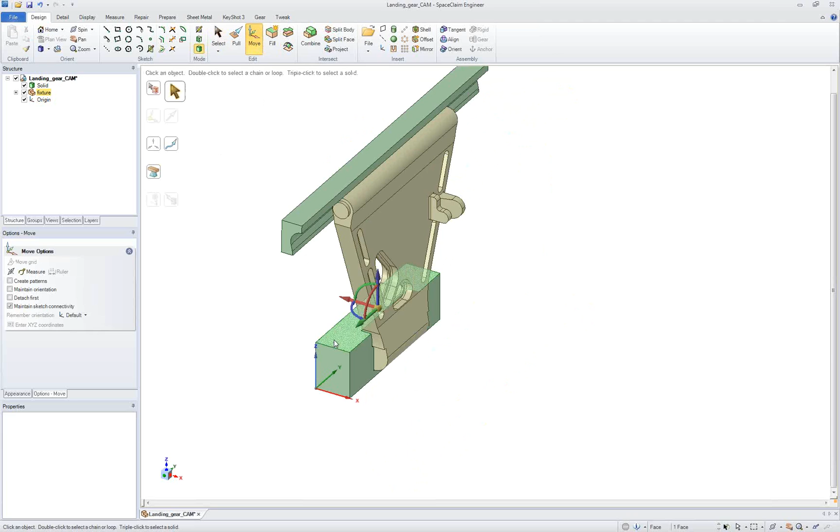These are great ways to snap, change, and manipulate a part without ever having to know how a designer built it, what needs to be changed, or why they did certain things. You're able to take in geometry in 3D or 2D from a lot of other sources with SpaceClaim, and you don't have to build geometry from scratch every time someone sends you a corrupt model that needs repair, or a 2D print that needs to be in 3D.

Is there anything else you think I should be showing, Chris? This is just a little intro that I thought would be a good overview of SpaceClaim and how we work to help prep geometry for manufacturing. No, I think that's excellent. Great.

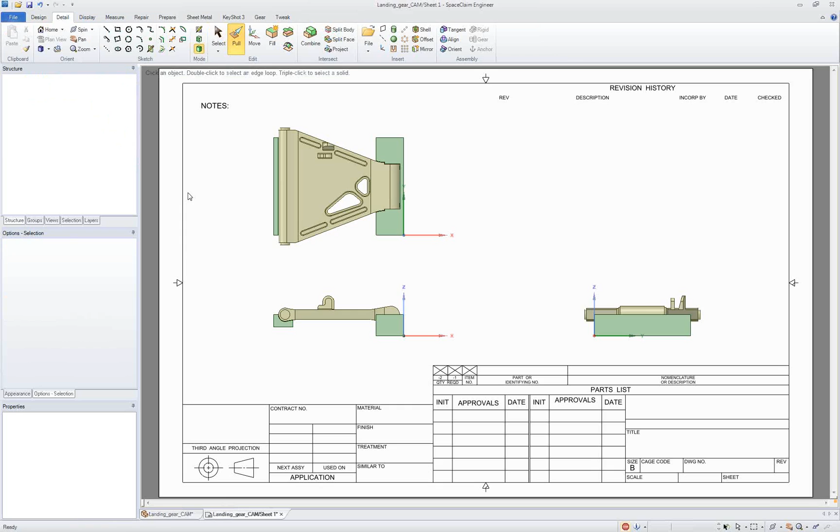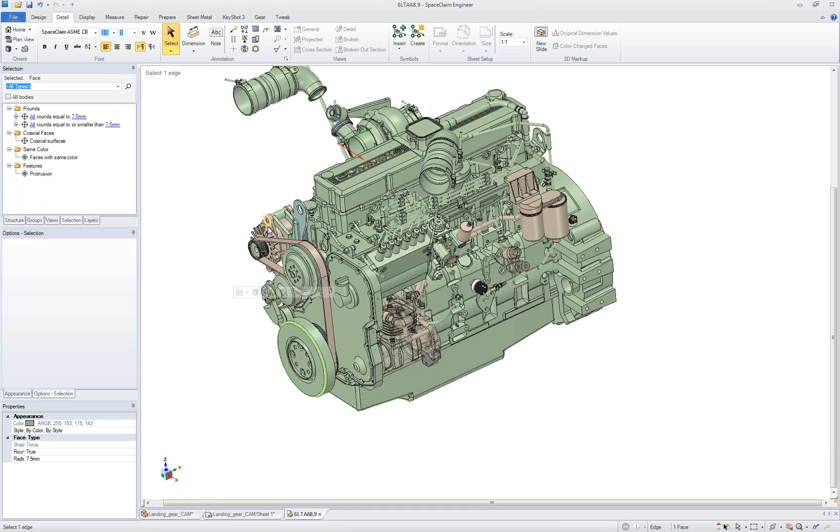It's a slightly different model, but this shows the power of how SpaceClaim can repair a model for manufacturing and also work with large assemblies. If you get sent large assemblies and need to pick out parts or pieces for machining, SpaceClaim will take that geometry—this large assembly we could take and machine by picking out individual pieces. You can quickly hide others, take these out and isolate them for machining very quickly, copying them to a new design and easily isolating them in a model.

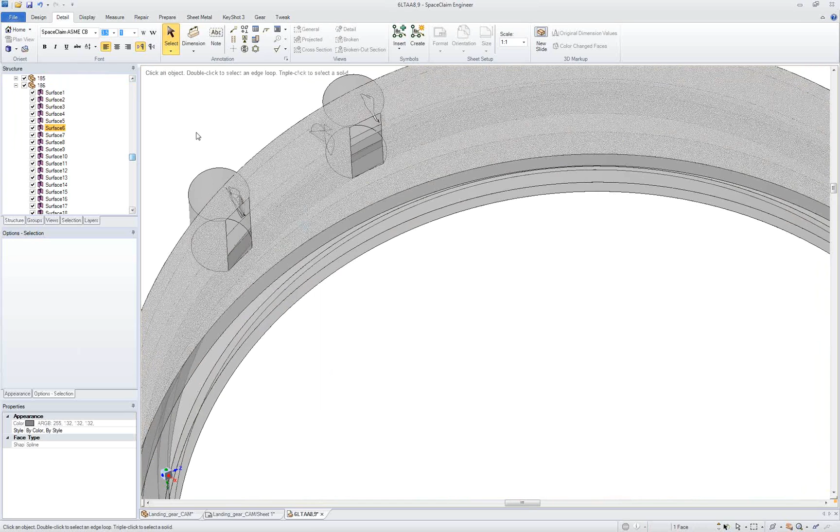But if I want to show some heavy-duty repair work, I want to go ahead and find all of these surface bodies which aren't watertight solids. With SpaceClaim, I see sometimes a lot of really crummy parts and models. For instance, in this model, if I locate it in the structure tree, there are a lot of surfaces on the body, but on top of that, you see some surfaces that are just—I don't even know the right word to describe these crummy faces.

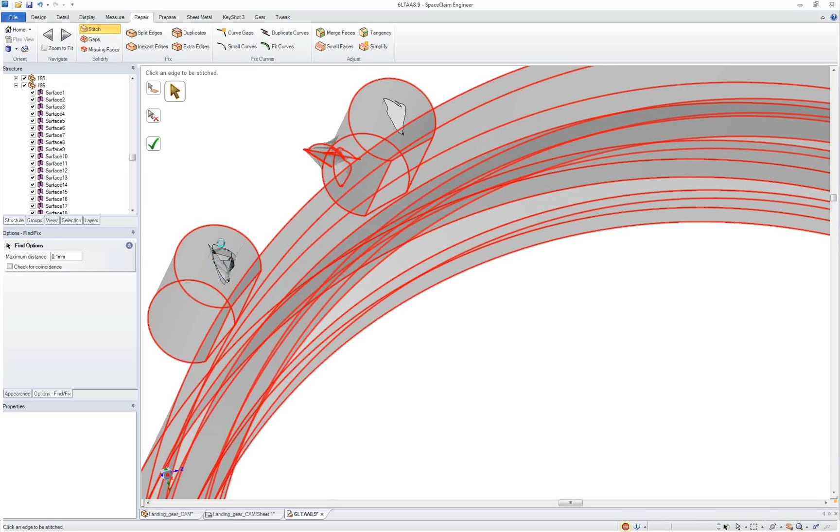SpaceClaim will let you take this, and what Stitch does is say, hey, if these are different parts of the model or different surface bodies, to help make this a watertight solid, we'll go ahead and stitch all these surfaces together into one. We have a lot of simple tools to help you work with and manipulate the part—for instance, if there are faces folded up on itself, really crazy looking, SpaceClaim will repair those on the fly. We can just flat out delete bad faces on the part, and now use that to clean up the model.

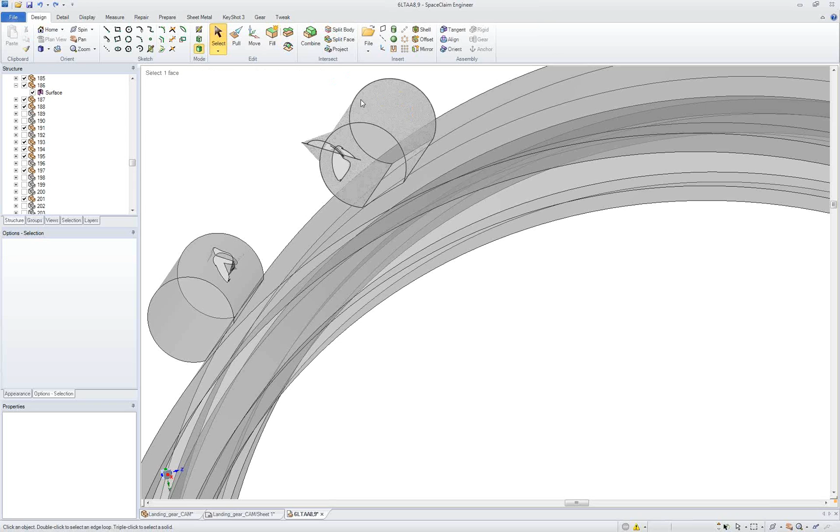So if I want to take this and clean up a model or a part that's there, I can have SpaceClaim start to do that really quickly. I can take edges that are there and go through and start to remove them on the part and fill them in, getting rid of some of these crummy edges.

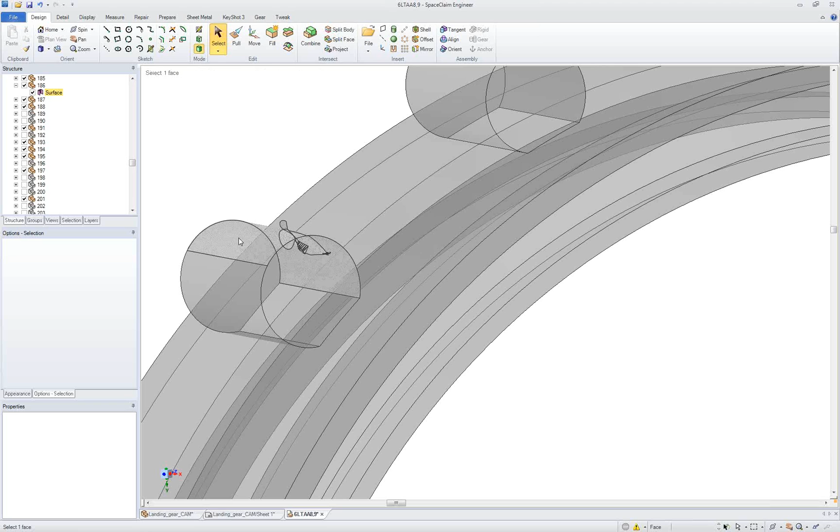To us, this is just geometry. If I wanted to cut a face up on the part and split it to get rid of it, this is what SpaceClaim allows you to do. Cut it up, delete a bad part of the model, and use our automated repair tools to find missing faces, repair them, patch them into the part, and now we have a nice solid. Now we can easily create rounds on the part so we can fit our machine tool into it and start prepping this for manufacturing.

Yeah, that's perfect.

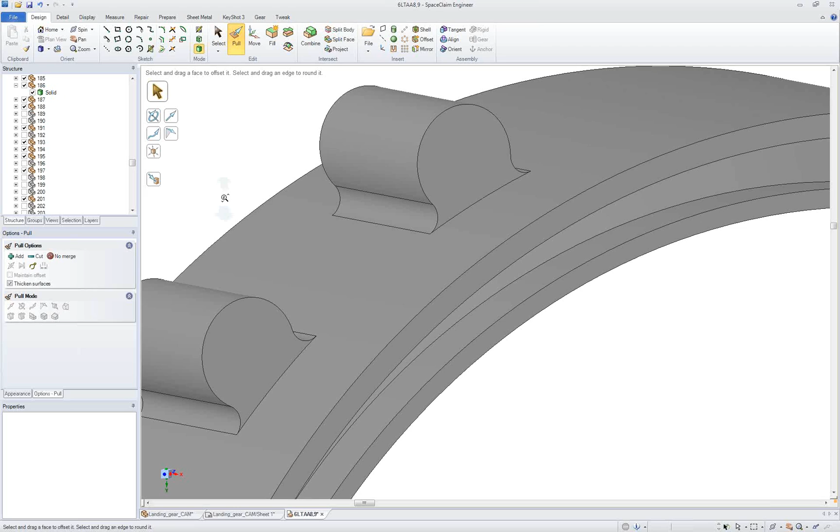And this is what I like, because you can take edges, take rounds, snap them up to an adjacent face or an equal one to make sure they're all the same size, so you don't have to remember and type it in every time. You can just snap it up to that value to make a change on the part. A lot of times designers don't think about why rounds are in a part or what they need to do, so this lets you be a value add to your customers and solve their problems without always requesting they make changes they don't even understand. It gives you the power to get in there and speed up the entire process.